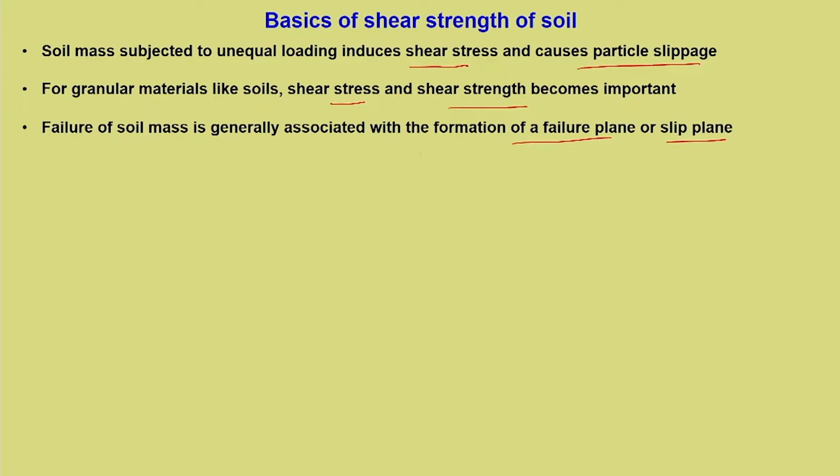Now, a very important point is that the critical combination of stresses acting on the failure plane reaches its maximum limit. This particular phrase is very important - critical combination of stresses - which we will appreciate better as we move further. Shear strength is defined as the limiting value of shear stress that the soil can withstand with reference to the failure plane. It is always done with reference to the failure plane, and it is the limiting value of shear stress.

Shear strength is equal to the maximum shear stress only under certain conditions. Read these two sentences together. In the first sentence, we say that it is a limiting value of shear stress which is associated with the reference failure plane. So it is not actually equal to the maximum shear stress in the soil, but the maximum shear stress becomes the failure shear stress under certain condition.

We will discuss this when we discuss more about undrained shear strength. Since there is slippage of particles, the interparticle interaction induces strength in the soil. So any particle which moves over one another, there will be a sort of friction which gets developed. So strength mobilization is mostly due to frictional resistance between the soil particles.

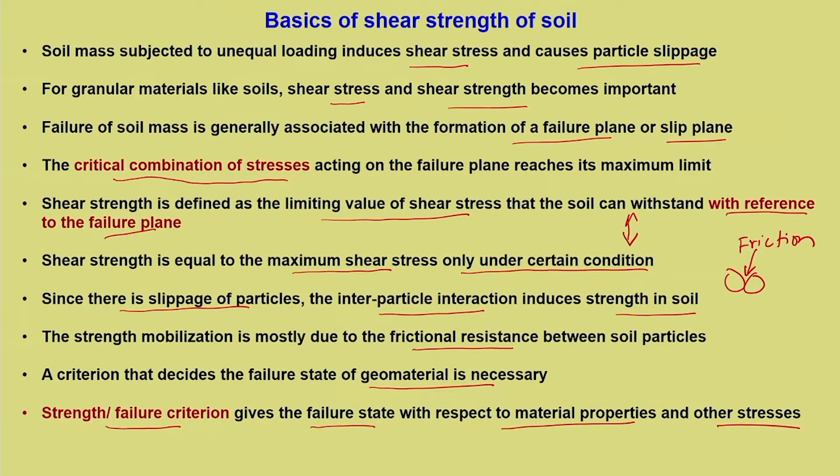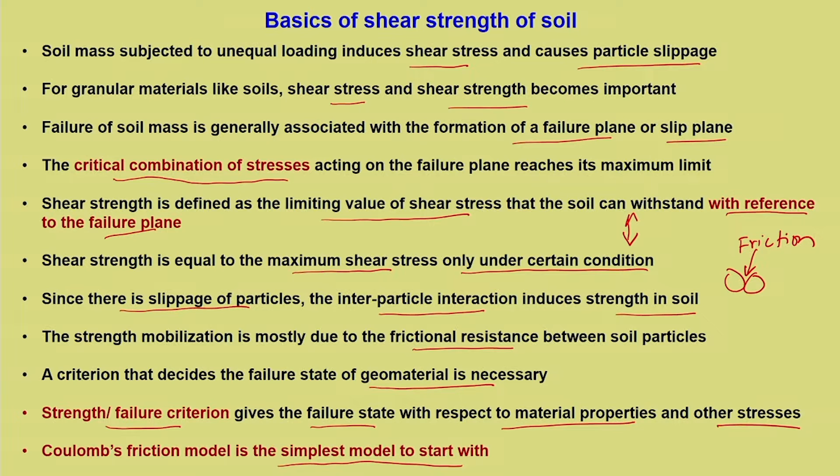Coulomb's friction model is the simplest model to start with. Why? Because Coulomb has talked about friction. So this becomes the simplest model to understand what kind of strength the soil imparts. Let us go into the simplistic explanation of Coulomb's friction model.

There is a block and it has a horizontal force, T is the resistance, W is the weight, N is the reaction. So this is R, the resultant. It acts at phi dash. Now, if you translate this to soil,

we can see that we have two particles and there is an actual area at the point of contact, and this is N is the force and T is the horizontal force. N is the normal force and T is the horizontal force at the actual area of contact between the two particles. So we can write T limiting condition is equal to mu into N, where mu is the coefficient of friction, and we can write T limit is equal to N tan phi dash, where mu is equal to tan phi dash. Now we are just translating this to soil, and in stress form one can write tau f is equal to sigma dash f into tan phi dash.

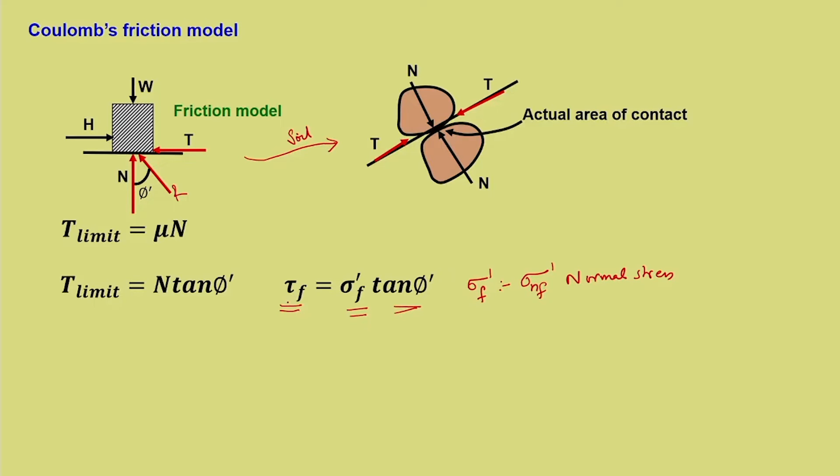Here sigma dash f is, we can write sigma n f dash, which is normal stress. Now we need to be very specific here. It is the normal stress acting on the failure plane. So tau f is the shear strength or the failure shear stress which is acting on the failure plane. So the friction model is the basis for mathematically defining shear failure of soil.

That is what I told. There are different ways by which we understand shear strength. Now, whatever it be, we need to define this in a mathematical framework. Then only as engineers we can use it further.

In addition, for soils, there are several factors which need to be considered. For a normal block model, several other complications will not come into picture. But for a geomaterial like soils, we also need to consider various other aspects. We need to consider load application, which induces volume change.

Now, if you remember in module 1, we told that we will study the soil in a decoupled manner. We will consider volume change separately and we will consider deformation separately. Now, for stress strain response and various other continuum mechanics problems, this is fine. But when you consider actually the shear strength, that is the shear stress which gets induced during loading, you also need to consider what type of volume change response it undergoes under a given load, because that is going to change the state. The volume change is going to change the state.

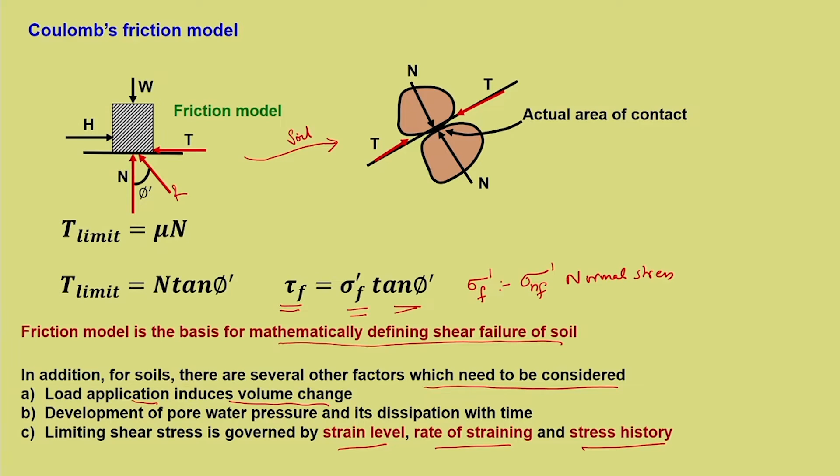Extending Coulomb's model, we have so far considered only the frictional aspect. But there are certain cases where soil has cementation, for example from precipitation of certain minerals. A good example is microbially induced calcite precipitation, which enhances the strength of granular soils through cementation. This also enhances soil strength, and this has not yet been considered in the Coulomb's model we discussed.

So for cemented soil, one can write tau f equals C dash plus sigma dash f tan phi dash. Note that we have specifically used C prime, sigma f prime and phi prime, or phi dash as we call it in both ways. Why is this so? It needs to be specified that this model is specific to effective stress condition.

You may ask why this quantity does not have a prime or dash, because water does not have shear strength. So whatever it is, both effective and total condition will be the same. This is dealt mostly in terms of effective condition, and I would like to remind you of the effective stress principle. This depends on how well you were taught this during your UG, because it is extremely important, and the whole of soil mechanics is founded on this. We do not talk about effective stress condition in any other material, mostly in granular material, specifically soils and rocks.

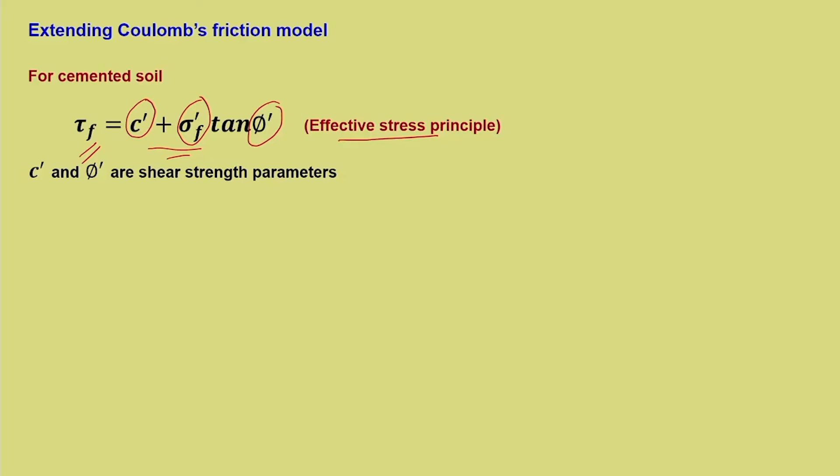C dash and phi dash are the shear strength parameters. It is very easy to state the strength of the soil in terms of C dash and phi dash, but there are several misconceptions also associated with this, which is generally not discussed during UG. So those who have missed that, it is better that you refresh that now.

C dash can be true or apparent cohesion. What is C dash and where does it come from? C dash is either a cementation characteristic, which we call true cohesion, but it can also be due to certain characteristics of the pore water. Pore water can induce a sort of cohesion depending upon the state of saturation, so you call it apparent cohesion, meaning it is not always going to be there.

Another possibility of this cohesion is for the over-consolidated state. I will not get into the details now, we will discuss that at length. But this cohesion depends on certain conditions, whether it is going to be there or not is not sure, it is condition specific. That is why it is called apparent cohesion, while true cohesion refers to cementation which is there for shear. That distinction one has to make. Sometimes C dash becomes a mathematical artifact as well.

That is why in some designs we tend to ignore the cohesion part and consider phi dash, which is more relevant for granular materials like soils. When I say this, some of you may not agree with me, and would immediately say that clay has cohesion and sand has friction. This is the manner in which we are normally taught, but probably subsequent lectures have not discussed the extension of that. We will see this in detail, and this is where we need to clarify our concepts clearly.

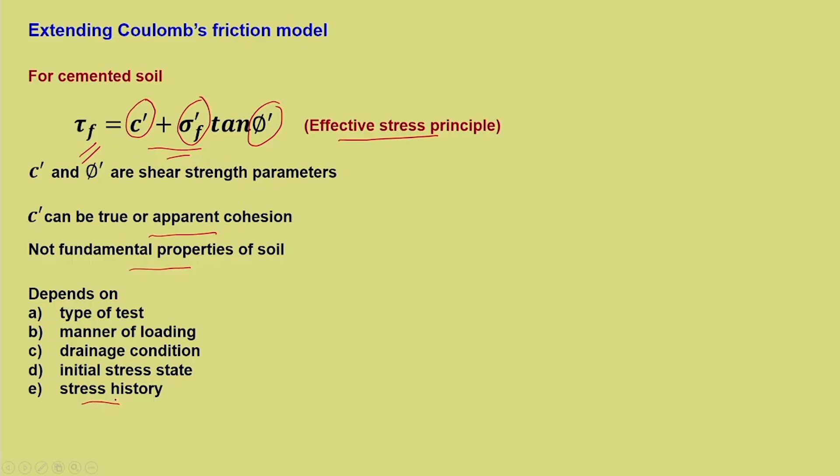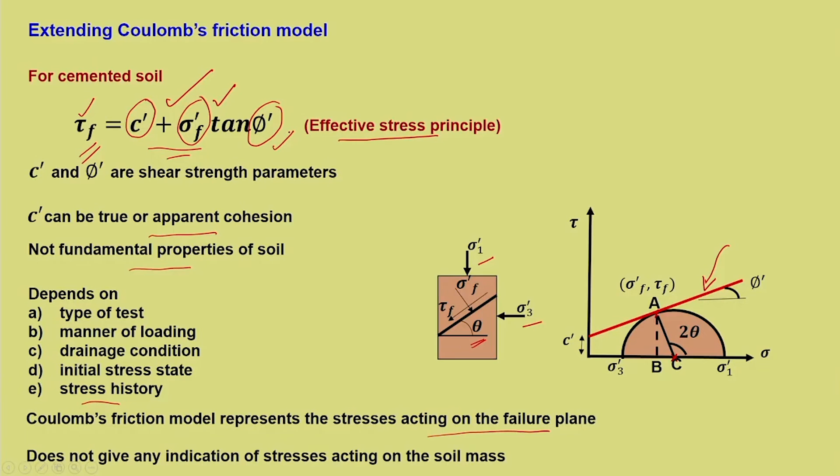So, that is what it is about extension of the Coulomb's friction model to account for the cementation characteristics or apparent cohesion. But Coulomb's friction model, if you refer to this, it does not talk about the stress acting on the soil. Stress acting on the soil is in terms of sigma 1 dash and sigma 3 dash. So, Coulomb's model does not give any indication of what stress the soil is subjected to.

So, referring to the figure, again the same figure, we can write sigma dash f is equal to OC. So, this point is O, OC minus BC. So, here I am talking about sigma dash f, this is OC minus BC. Now, you can write sigma dash, what is OC and what is BC.

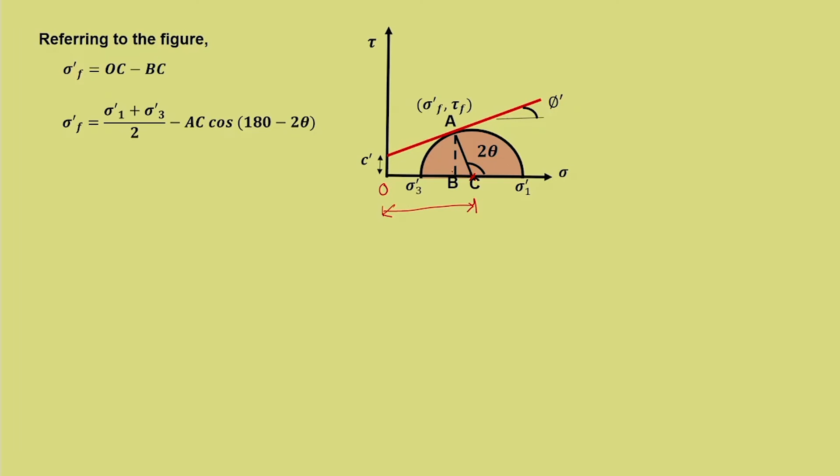Now, OC is from here to the center of the circle. So, that we can write it as sigma 1 dash plus sigma 3 dash by 2, average stress, minus what is BC? BC is AC cos 180 minus 2 theta, this angle is 180 minus 2 theta.

So, that will give sigma dash f is sigma 1 dash plus sigma 3 dash by 2 plus sigma 1 dash minus sigma 3 dash by 2, because AC is the radius of the circle, which is sigma 1 dash minus sigma 3 dash by 2 into cos 2 theta, and tau f is equal to AB, and that is nothing but tau f is equal to sigma 1 dash minus sigma 3 dash by 2 sin 2 theta, it is AC sin 2 theta.

And from the geometry one can always write 2 theta is equal to 90 plus phi, because this angle, if you draw here, this angle will be phi dash. So, it is 90 plus phi dash, and hence theta is equal to 45 plus phi dash by 2. And what is theta? Theta is the inclination of failure plane with the major principal plane.

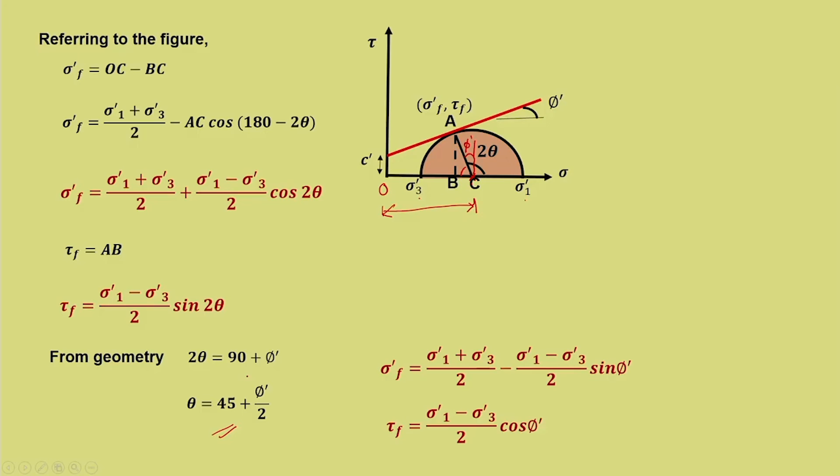Now, if you substitute for theta, that is 45 plus phi by 2, you will also get this equation: sigma 1 dash plus sigma 3 dash by 2 minus sigma 1 dash minus sigma 3 dash by 2 sin phi dash. I have purposely written this, why? Because in certain textbooks it is written in this form and in this form. So, you should not get confused why it is written in this manner. That is why you just need to substitute 45 plus phi by 2, you will get this equation.

So, now let us come to a more important or prominent failure criterion for soil, which is known as Mohr-Coulomb failure criterion. Now, we have already stated in the previous slide that Coulomb's model does not talk about the stress acting on the soil. So we just want to make that modification, and that is how the concept of Mohr circle has been integrated with the concept of Coulomb's model. So, this is one of the most powerful yield criterion or failure criterion in geomechanics or soil mechanics.

This is elastic perfectly plastic model. Now, I hope you remember whatever we have discussed about elastic perfectly plastic in module 1. So, up to a certain limit, for example, this is stress and this is strain, you have a response like this. So, up to a certain limit you have elastic characteristics, and once it reaches this limit, the soil yields. That is why it is called elastic perfectly plastic. And what is this value? This value is the limiting condition of stress.

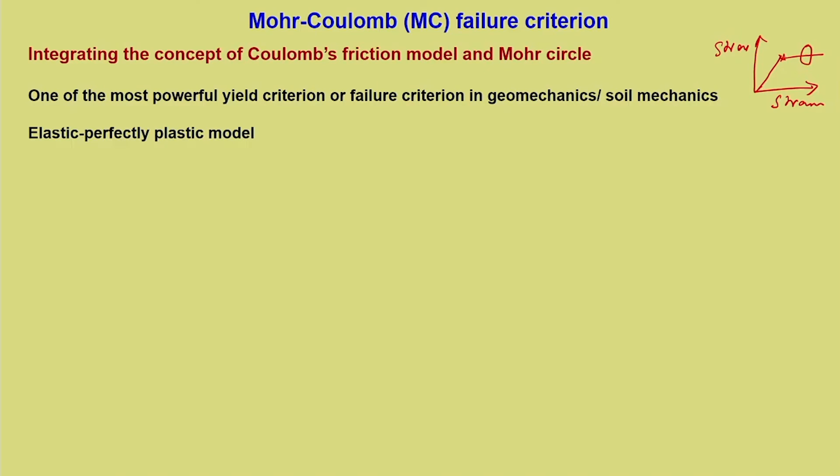Consider Coulomb's friction model represented by PQ. That is the same figure again, tau versus sigma plot. PQ is the required Coulomb's friction model which is stated as tau equals C dash plus sigma dash tan phi dash.

Now consider a cylindrical soil sample subjected to principal stresses, again the same figure. Failure occurs when the Mohr circle touches Coulomb's failure line. When will failure occur? It occurs when the Mohr circle touches the failure line, and the Mohr circle represents the stress state of the soil. If this condition is met, at that particular point the soil is bound to fail.

So sin phi dash, with inclination phi dash, one can write as AC by PC, and this you would have derived during your UG, but I am just revising it. Sin phi dash: AC is the radius, PC is PO plus OC, OC is sigma 1 dash plus sigma 3 dash by 2, and PO is C dash cot phi dash.

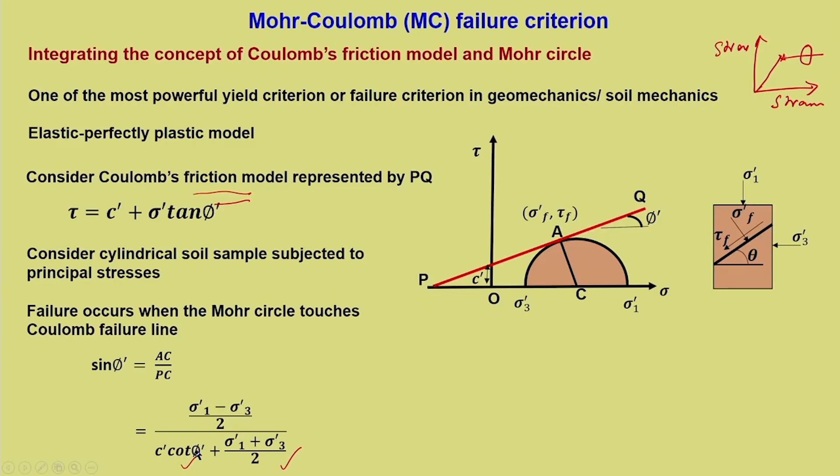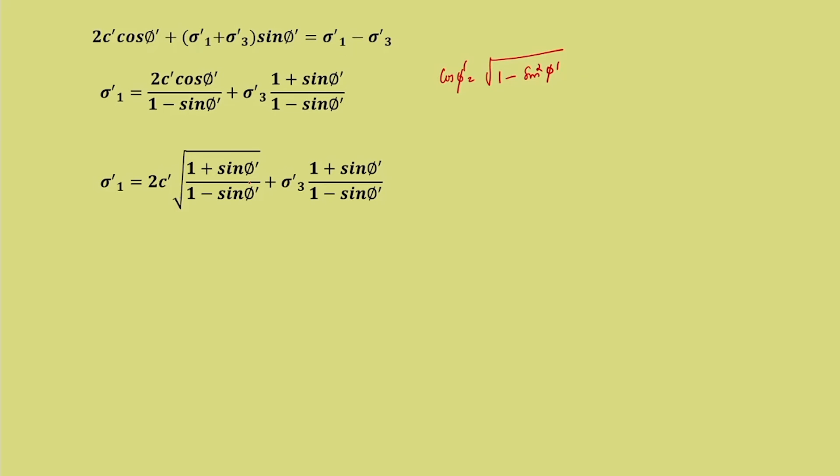If you rearrange it, you get sigma 1 dash equals 2 C dash cos phi dash by 1 minus sin phi dash, plus sigma 3 dash times 1 plus sin phi dash by 1 minus sin phi dash. Now if you write cos phi dash equals root of 1 minus sin square phi dash, and substitute this for cos phi dash, you get sigma 1 dash equals 2 C dash times root of 1 plus sin phi dash by 1 minus sin phi dash, plus sigma 3 dash times 1 plus sin phi dash by 1 minus sin phi dash.

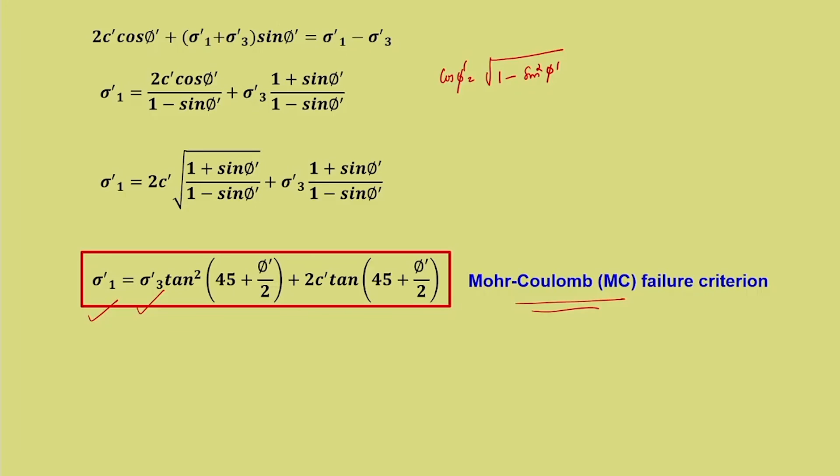This gives the popular Mohr-Coulomb model: sigma 1 dash equals sigma 3 dash tan square of 45 plus phi dash by 2, plus 2 C dash tan of 45 plus phi dash by 2. This is the popular Mohr-Coulomb failure criterion. This expression represents things in terms of the stresses acting on the soil, so we will discuss some facts about the Mohr-Coulomb failure criterion.

Soils cannot have a state above the Mohr-Coulomb failure line, and it is essentially an effective stress criterion. Mohr-Coulomb is independent of the intermediate principal stress sigma 2 dash - we do not discuss sigma 2 dash. It does not consider the strain at which failure occurs; there is no mention of the strain at which failure occurs according to this criterion.

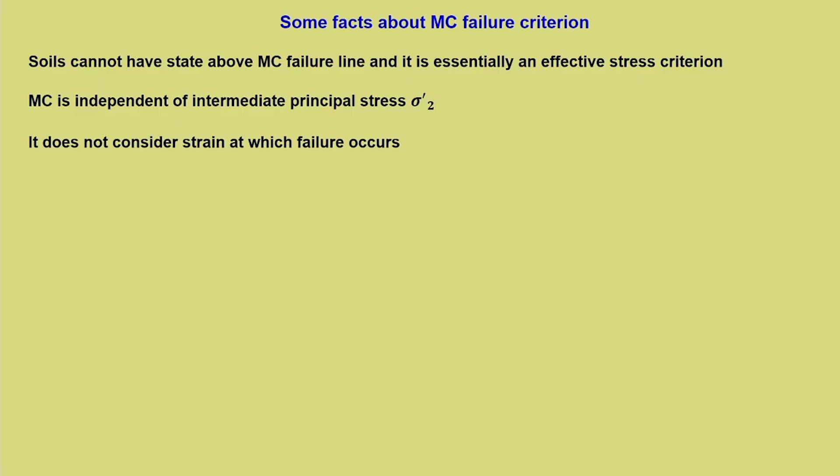But in certain cases strain or displacement may become a governing factor, meaning it may not be tolerable even though the soil has not failed. So sometimes strain-based criteria become important. The failure envelope is independent of normal stress, meaning linearity and slope are constant.

We need to understand this carefully. Failure envelope being independent of normal stress means that on the tau versus sigma dash plot, this line has a constant slope. So the entire failure envelope is not dependent on normal stress, rather it is a constant. You should not confuse this with failure stress, because failure stress is dependent on normal stress, but the failure envelope is not, since it is a constant.

This may be true, or it may not be true, for a wide range of normal stress. For a wide range there is a possibility of non-linearity, but for a moderate range we can still approximate it to be a straight line.

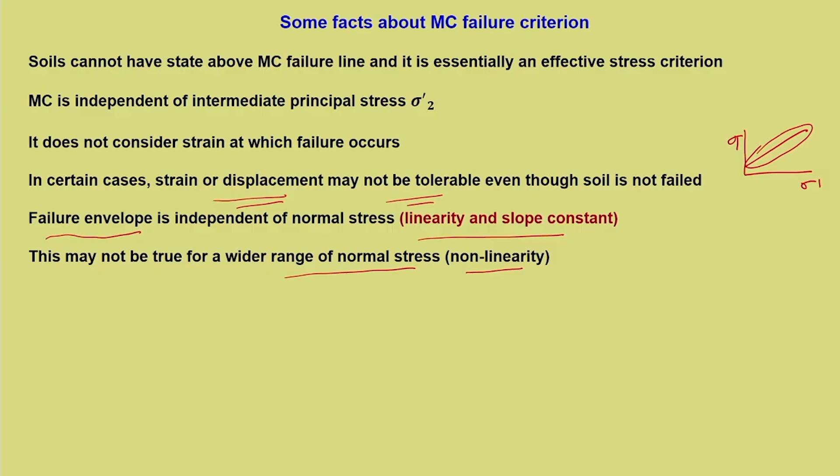Now if we ignore cohesion from the Mohr-Coulomb failure envelope, one can rearrange it and take sigma 3 dash outside, giving sigma 1 dash by sigma 3 dash at failure, minus 1, plus 1. This term sigma 1 dash by sigma 3 dash at failure is called maximum effective stress obliquity. You can see that according to the Mohr-Coulomb failure envelope, failure occurs when maximum effective stress obliquity is achieved, not when maximum shear stress is achieved.

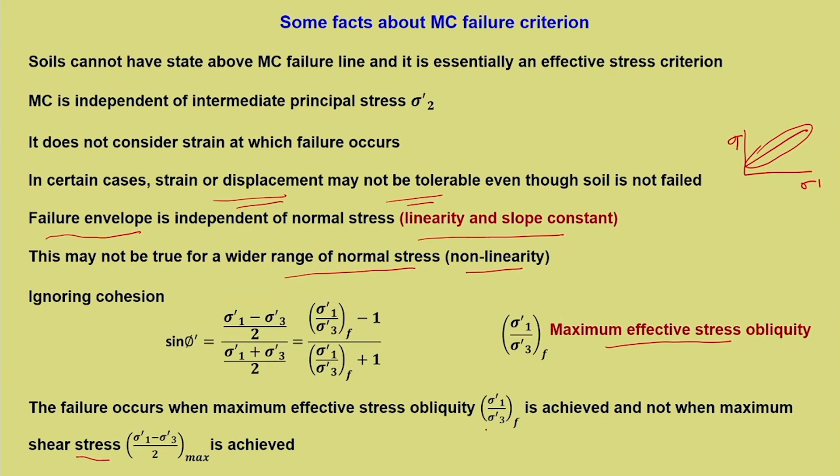The maximum shear stress is sigma 1 dash minus sigma 3 dash by 2. Now what we are concerned about is the maximum effective stress obliquity.

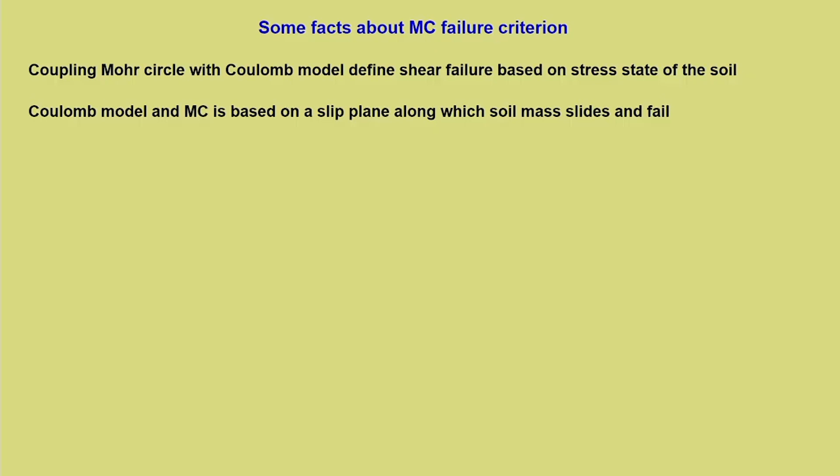Coupling the Mohr circle with the Coulomb model defines shear failure based on the stress state of the soil. The Coulomb model and Mohr-Coulomb model are based on a slip plane along which the soil mass slides and fails. In actual cases, there are shear bands or pockets that reach failure, which specifically pertains to the dense state, or it undergoes significant plastic deformation, that is strain hardening, in the case of the loose state.

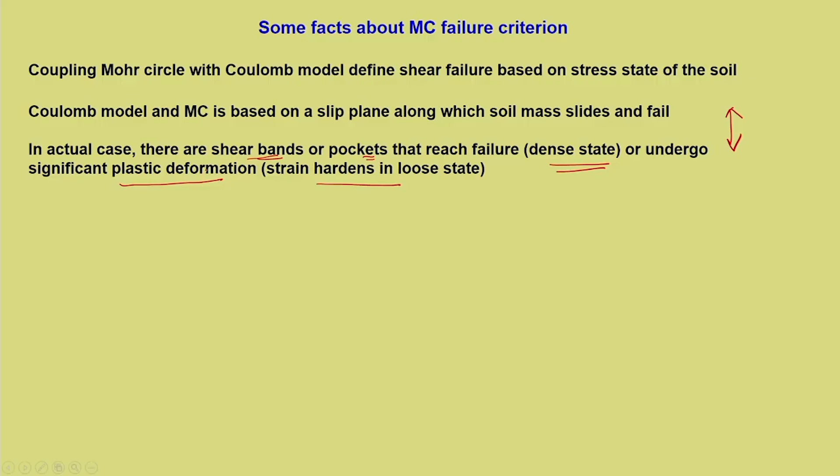We need to read these two sentences together. What it means is that the Coulomb model and Mohr-Coulomb model assume a slip plane along which the mass slides and fails, but in reality you may see formation of shear bands or pockets which reach failure faster than the other parts of the soil. This is mostly specific to the dense state of the soil, or it may undergo ductile behavior or plastic deformation for the loose state of the soil.

Okay, so that is all. We will see the remaining part in the next lecture.